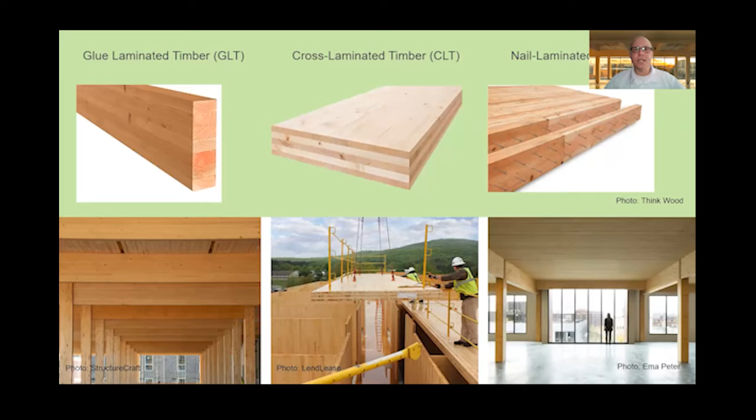Now, nail laminated timber is really what it seems to be, right? It's dimensional lumber, face nailed to one another, and you create a panel product that you can lift and place just like CLT, except you're using mechanical fasteners instead of structural adhesives to hold those laminations together.

The last 3 products I want to touch on: dowel laminated timber. Now, just as everybody was really starting to get their head wrapped around what cross-laminated timber was, industry introduced dowel laminated timber. And basically what that is, is the softwood base material. You take 2x material and lay them side by side. And then you take a hardwood dowel that has a moisture content that is less than the base material. That base material is pre-drilled.

That hardwood dowel is pressure injected through that base material, and over time, it will wick the moisture out of the base material, expand the hardwood dowel, and mechanically lock everything into place. So the nice thing about this is there's no steel fasteners, no metal fasteners, no resins, no glues, no adhesives. So you have a completely green product from start to finish.

Mass plywood panels, or MPP panels, that's really an iteration of cross-laminated timber. Where CLT uses dimensional lumber, MPP panels use veneers, like a structural composite lumber, to create large billets up to 24 inches in thickness. So really, we're looking at using these as panel products. They can even be manufactured and fabricated as columns and beams as well.

And last, but certainly not least, is heavy timber lumber decking. Now, we see this used quite frequently in applications where maybe a design team feels a little bit comfortable with using a glulam post and beam system, but maybe not really ready to dive into using CLT or something like that. A heavy timber decking product will actually really give you that look without necessarily having to commit to learning CLT and the design of that.

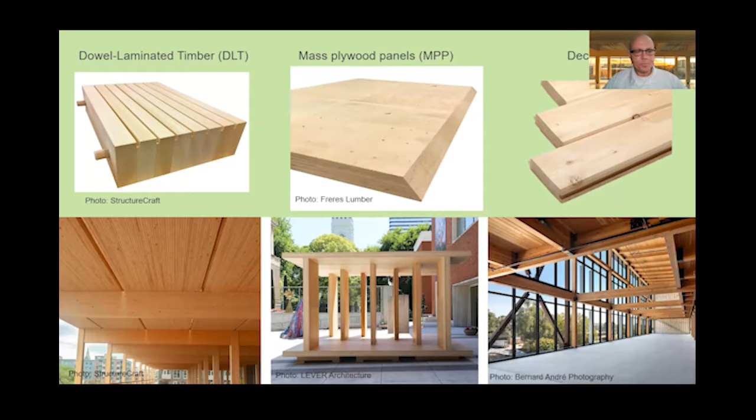The next one I want to introduce is T3 Atlanta. Now, T3 stands for Timber, Transit, and Technology.

This is the second building that was developed by Hines, and for the second time, StructureCraft was selected by Hines as the mass timber structural engineer on the project and the builder for the timber superstructure. So the first T3 was in Minneapolis, and that was completed back in 2016, and it really helped spark that kind of mass timber revolution that we're currently seeing in North America.

To give you a little bit more detail about this building, the gravity system really used dowel laminated timber, like we just spoke of, for the floor and roof panels, and then glulam post and beam substructure. The whole entire lateral system on this building is perimeter and internal steel brace frames that StructureCraft actually installed in sequence with the timber structure, rather than using a concrete core. This really helped them speed up the process of construction.

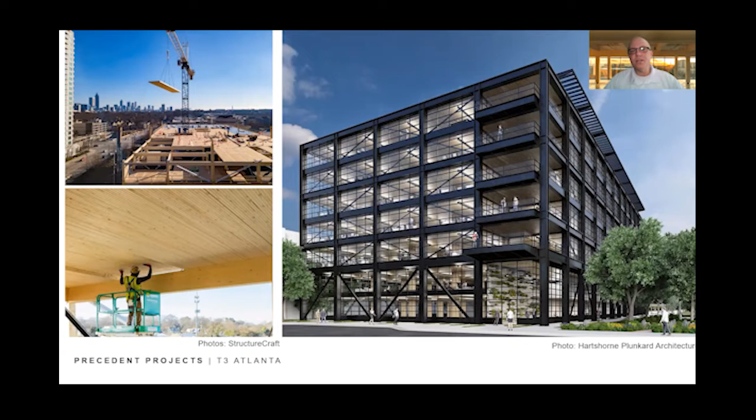So overall, we're looking at a 7-story building, about 205,000 square feet in Atlanta. Really exciting project.

Now, mass timber in the code. What do our current codes allow us to do with mass timber? So as it stands today, and yes, even in Florida, we can get up to about a 5-story residential type project with mass timber when we look at, say, type 3, type 4, type 5 construction. That's what we're very comfortable with. That's really the sweet spot for timber construction, whether it's light frame or heavy frame or mass timber.

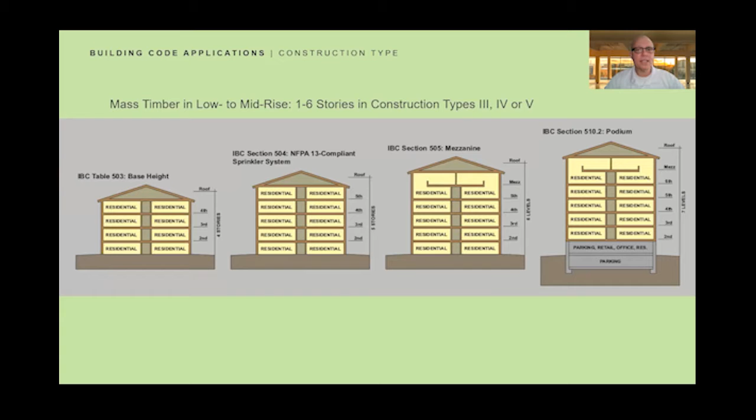With a business occupancy, we can get upwards of about 6 stories. And so when we think about this, we can really have some great opportunities for residential and business occupancies. And we can really even push the envelope a little bit further by incorporating a mezzanine in there, or putting it on a podium, something like that, to help increase density in areas where we may need that.

Now, that's what we can currently do, but what does the future tell us for mass timber? How are the codes evolving to allow us to push that building envelope a little bit further? So the 2021 IBC actually introduced 3 new types of construction specifically created for mass timber. We'll now have a type 4C that will allow us to go 9 stories and 85 feet. We'll have a type 4B, which will allow us to achieve 12 stories of mass timber up to 180 feet in height, and a type 4A, which will allow us an impressive 18 stories and 270 feet in height.

Now, the thing to keep in mind here is each one of these have varying levels of fire protection that is required, and a handful of other requirements during the construction process, which is a conversation that we can dive into at a later time. But really, with a type 4C building, you're going to be able to leave that entire structure exposed.

In a 4B building, there's going to be a little bit of an interaction equation that you'll have to apply based on fire area, where you can leave either a portion of the wall exposed or a portion of the ceiling exposed, and using that interaction equation will allow you to determine the percentage of the structure that you're actually allowed to leave exposed in that building.

And then the type 4A building is going to be completely encapsulated. All of your mass timber exterior bearing walls will have to have 3 hours of fire protection. Two of those hours can come from membrane protection, and the additional hour to achieve that 3-hour rating can come from charring calculations. And then the floor panels and roof panels require a 2-hour fire protection. So varying levels of protection required.

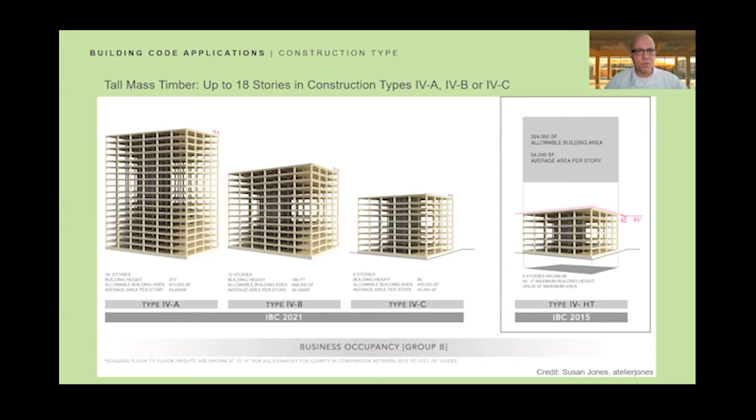Will Florida be adopting this? We don't know. The Florida Building Commission has just started their meetings. They just wrapped up the 2021. So they're just starting code hearings and meetings and going through this and trying to determine where we're going to land on this. So more to come over the next several years in the next code cycle.

Now, jumping into the opportunity and everything that we're super excited about here, talking about the grant that LULAB received. So in August of 2019, LULAB received a Wood Innovation Grant with the support of WoodWorks. I have been on the team here at WoodWorks; July will be 7 years for me. And previously, there was really no motivation to try to break into Miami, because we all know it's typically a concrete jungle. And then arrive Chris and Shauna Meyer, who reach out to me and say, hey, we're looking to do this Wood Innovation Grant. Would you write us a letter of support?

And so for me, it was a no-brainer to have this wonderful team down there to kind of help be the catalyst, if you will, to get this process going. And so really the intent was to help raise awareness in South Florida of mass timber. And we were able to hold our first event, pre-COVID, just before we hit that, right, in February of 2020.

We had the first mass timber event at the Perez Art Museum called Miami Resilience. It was an absolutely wonderful event. We had the opportunity to kind of roll out an introductory presentation on what mass timber products are, a little bit more in depth than this intro that I did. But really it was a way for us to kind of break into the industry in South Florida and start explaining what mass timber is and what the benefits are.

That was followed up by an evening event as well at the University of Miami at their School of Architecture, where we had some additional speakers and just really a great opportunity to learn more about what LULAB was doing and the School of Architecture was doing there at the University of Miami. And then in August of 2020, Wood and Everything After, they created an upper level design studio that was taught at the School of Architecture at the University of Miami.

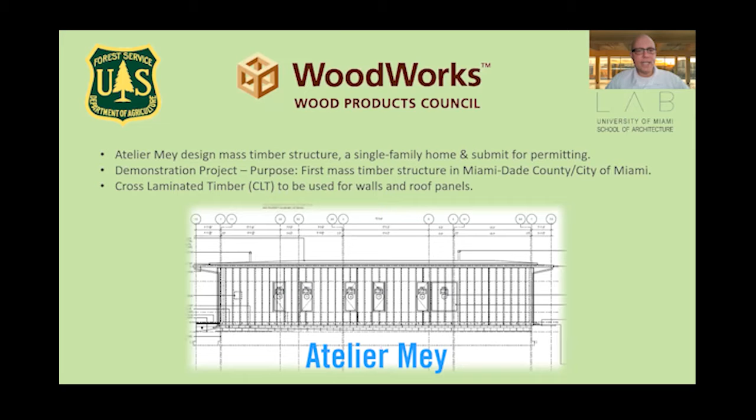And so the intent was to use cross-laminated timber for the walls and roof panels as well on this project. And here's just kind of an interior rendering of what it looks like, as well as a site plan of the project. Now, what were the conditions for acceptance that Miami-Dade had in place? And so first and foremost, we had to show them that it was in the Florida Building Code. So section 2303.1.4 is the section of the Florida Building Code that states that all cross-laminated timber has to be manufactured in accordance with the APA PRG 320 standard. So in order for them to even consider that, they wanted to make sure that the manufacturer met those requirements.

The next was section 1626.2, the large missile impact test. I initially thought that was going to be the biggest hurdle for us to overcome, but it really ended up being the wet-dry cyclical testing, where we had to make sure that we showed that CLT could be superior to their requirements in section 2315.

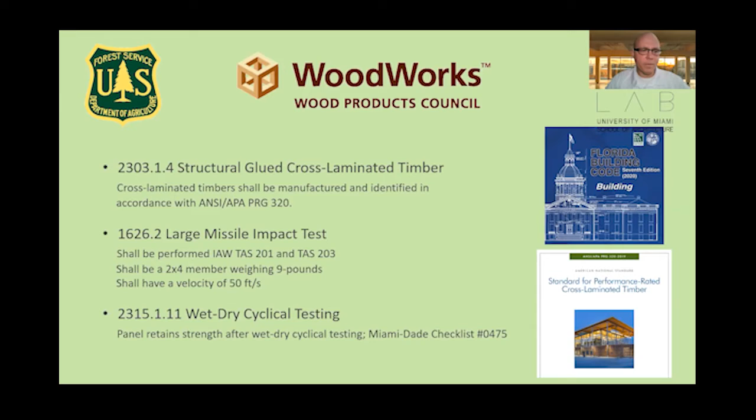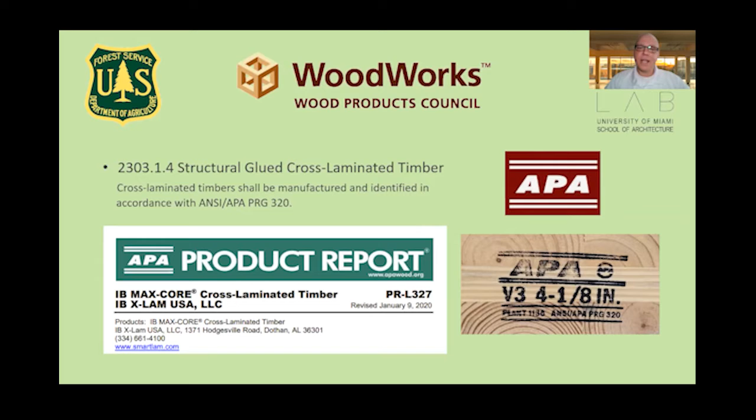So what kind of data and test reports did we have to submit? So in order really for them to say, okay, we feel comfortable, we see that it's in the Florida Building Code, but the manufacturer has to prove to us that they meet those requirements and they manufacture CLT in accordance with that standard. And so basically, it fell onto the shoulders of SmartLam, who would be the CLT provider for this particular project, and they really had to submit their product report showing that they met the requirements of the PRG 320 certification process and that their manufacturing facility was indeed certified.

The next step was really showing how we could meet the equivalence or better for the large missile impact test. And so what this really required is that there had been no traditional missile impact test that had been done on CLT as it would relate to hurricane loading, but a tornado shelter test had been done on CLT by the US Forest Products Lab. And so if you look at the difference between these two tests, you can see that there was a significant difference.

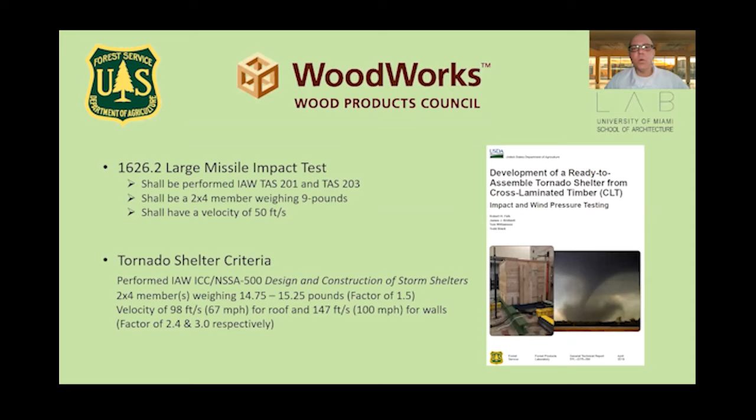This tornado shelter testing, really the weight of the projectile that was used was really on a factor of about a 1.5. So the mass for the projectile was significantly higher, as well as the velocity in which this missile would be fired at, upwards of a factor of 2.4 and 3.0 respectively. We're talking 50 feet per second, upwards of 147 feet per second. So Miami-Dade saw this information and said, okay, this test is far superior than what we're requiring. It meets the requirements for the large missile impact test.

Then it really came down to this wet dry cyclical testing requirement, or basically the moisture durability test. They really wanted to make sure that once this material was exposed to the hot, humid climates that we see here in Florida, that there wouldn't be any issues with the glue bond or delamination, if you will. They wanted to see that the panel maintained its strength. And so one of the big hurdles that we had to overcome was checklist 0475. And that was really for structural composite lumber. So basically plywood and OSB.

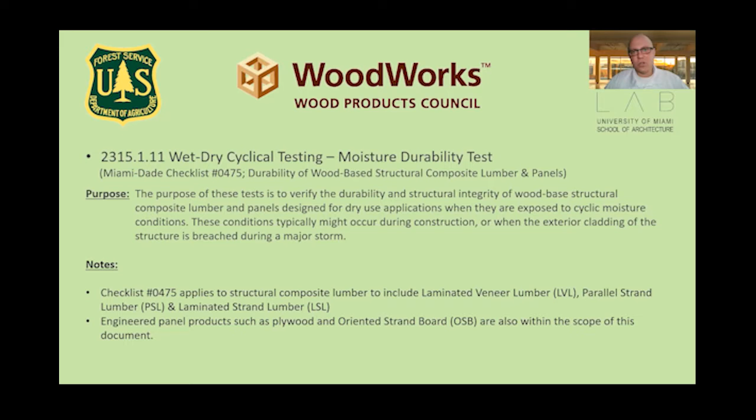So prior to this, Miami-Dade had never experienced CLT, and we needed a basket to put CLT in. And it fit the mold for a quote unquote panel product. While it wasn't a structural composite lumber that we were trying to present to them, it was dimensional lumber CLT. The PRG 320 standard still said that you could create CLT out of structural composite lumber. And so the main concern really became that glue bond and to make sure that that panel maintained its integrity and its strength after that cyclical loading test. And so how did we get there? How did we show them?

So in order to achieve that acceptance, there's a Canadian standard, CSA O112.10, which is basically the evaluation of adhesives for structural wood products. And so while we don't necessarily require that in the United States, the manufacturers that produce CLT don't want to cut off any potential opportunities to have projects in other countries. So all of their products meet this requirement. So luckily, we were able to bring this to the attention of Miami-Dade County. And then you can see here that it goes through a vacuum pressure treatment test. It goes through a boil, dry, freeze treatment test. And really what we wanted to show them was that this test was far superior.

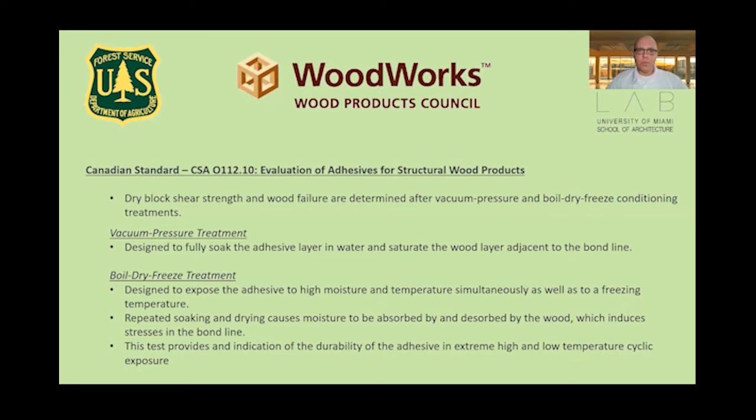So what ended up happening is we ended up leaning on the glue manufacturer that is used specifically for SmartLam's V3 grade dimensional lumber CLT. So Henkel was able to submit the documentation of the testing to show that their testing criteria supersedes the requirements of Miami-Dade County, and that it was a superior or more stringent test than the requirements that were set forth by checklist 0475. And so really the exciting news to share with you, as of last evening, I received an exciting text message from Shauna stating that they have permit in hand for Miami-Dade County's very first mass timber building.

And so while Chris was very kind to point out that a lot of this couldn't have been done without my help, I would say that a lot of this could not have been done without the absolutely amazing team of industry experts that we all pulled together to make this happen. There was definitely no one person that made this happen. It was a team effort. And I really just want to give thanks to Atelier Mey Architects for having the motivation and excitement to do a project like this and be willing to really take that uphill battle. WoodWorks, of course, SmartLam North America, Britt Peters and Associates, APA, the Engineered Wood Association, the American Wood Council, Miami-Dade County, and of course, the University of Miami School of Architecture LAB. Without all of these parties, this definitely could not have been achieved.

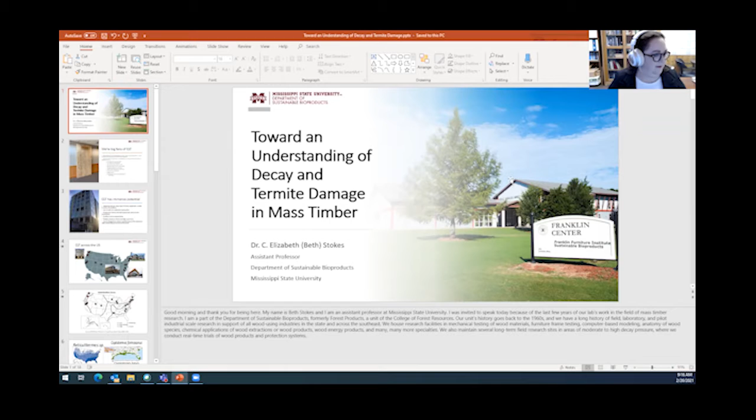Apologies, let me get my screen set up going here.

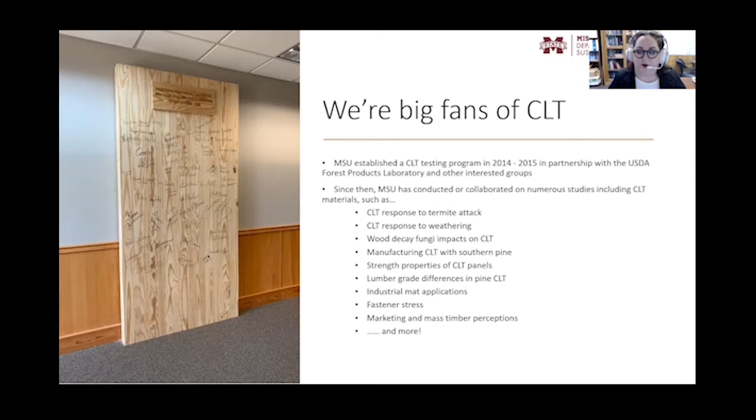So I say all that to say that our department is really hopeful that by investing resources and research efforts, we're going to continue to support the development of CLT across the Southeast as a very sustainable, highly desirable product for construction and industrial purposes. We believe this because we know that CLT has an immense potential.

We know its potential for industrial matting and heavy equipment use, but we've also seen firsthand the potential for low to mid-rise residential construction. The components for using CLT blend so well in a hybrid system with steel and concrete construction. It has unmatched carbon sequestration potential. It performs so well in seismic and high wind studies. Those have been done over the last 8 to 10 years. And it can be designed to achieve excellent fire resistance while maintaining a really strong structural performance. And we are so committed to seeing this proliferate through the Southeast.

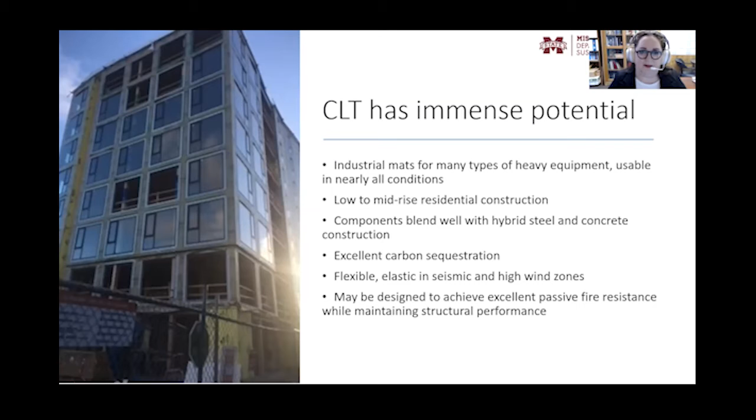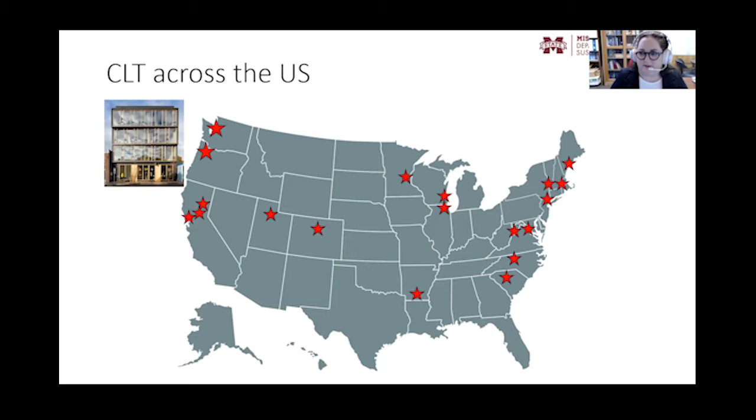Across the U.S., I just threw on some examples of where we're seeing CLT pop up. Things from Albina Yard in Portland, Oregon, which was the first U.S. CLT building from domestically produced CLT, to Adohi Hall. This is our new one at University of Arkansas, first large-scale mass timber residence hall and living learning community.

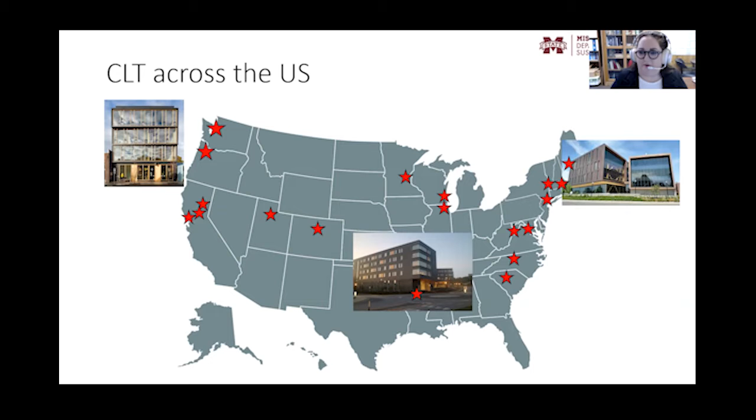Jeff mentioned the Olver building at UMass Amherst, largest academic CLT building. And from our friends at Clemson, we have the Quattlebaum Outdoor Education Center, which is the first CLT building in the southeastern U.S. made with southern yellow pine constructed panels from the Dothan, Alabama plant. These are not all of them, but these are some of the outstanding projects that I wanted to point out.

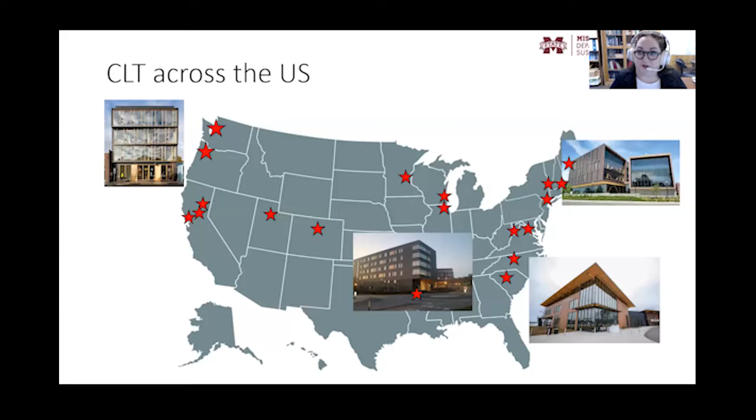So far, our buildings have been in zones 1, 2, and 3. We are now constructing buildings in zones 4 and 5 in Arkansas and Clemson and in Florida and in Alabama and so forth. We need to consider the different types of pressure that these buildings would face. If you were to build a simple post and beam structure on your own property, you would ensure that those materials were being used in an appropriate way.

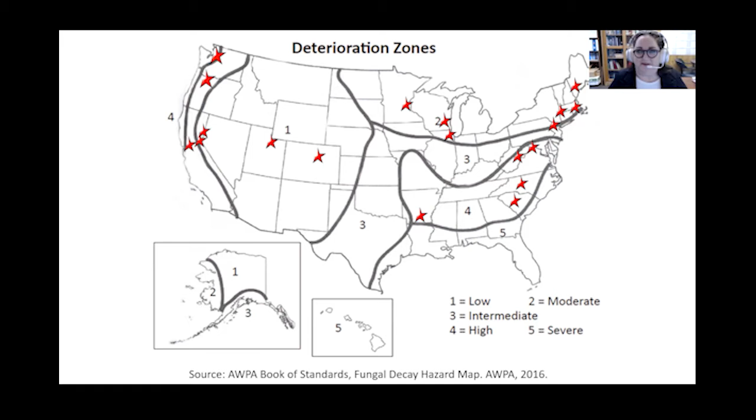We have to consider mass timber in the same way. We cannot just throw it into place and move on. So, there we go. One of the strongest pressures that are facing wooden structures in North America are termites. This is a question I get constantly: my mass timber is going to be attacked by termites. Not if you do the right things. And we know how to take care of termites.

Same with decay pressures. Termite pressures differ around the country. If you're in more northern areas, less of a problem, really not a problem. When you get into Southern California and the southeast, we have heavier termite pressures, not only from our native Reticulitermes species, which you see on the left of the slide, but also from, on the top right, the Coptotermes, the Formosan invasive termite, which is all across the Gulf South, down into Florida, across Louisiana, and unfortunately also drywood termites.

There are a few species of drywood termites. Typically, we see issues with these in Southern California, the deep Gulf South, Florida, South Texas. These are the termites that you would find in an attic that don't necessarily need contact with the soil to survive well. And they add a layer of concern in certain areas. So with these pressures comes a need to understand how we protect our wooden structures.

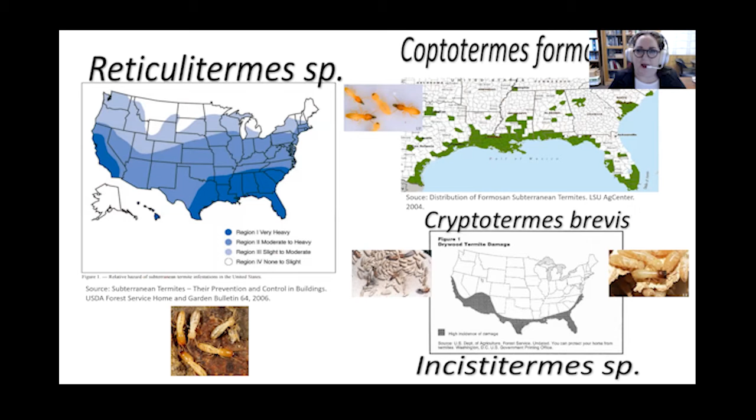I will address, while I have time, a few of the research questions that we have investigated so far. They really boil down to 3 areas. Our first question was, is typical CLT adhesive termite resistant? When I first started working with CLT in 2014 and 2015, one of the comments that I heard consistently is termites are not going to go past the glue line. CLT is so massive that that glue line is going to be a barrier. If that is true, it is a brilliant step in preventing termite infestations.

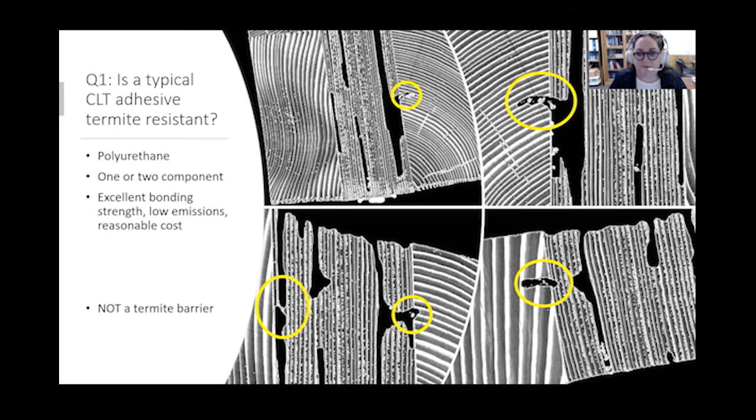So to look at that, we took some CLT sections and put them in the absolute worst case scenario. This is not something that a building should ever see. Absolutely worst case. And I will point out that it is not a barrier. This is a CLT made with a polyurethane 1-component adhesive that has excellent bonding strength, low emissions, reasonable cost, wonderful stuff, very strong CLT, fantastic. It's not a termite barrier. And you see in the yellow circles, our native termites were able to chew their way right across the glue line. It's just not a barrier in a worst case scenario.

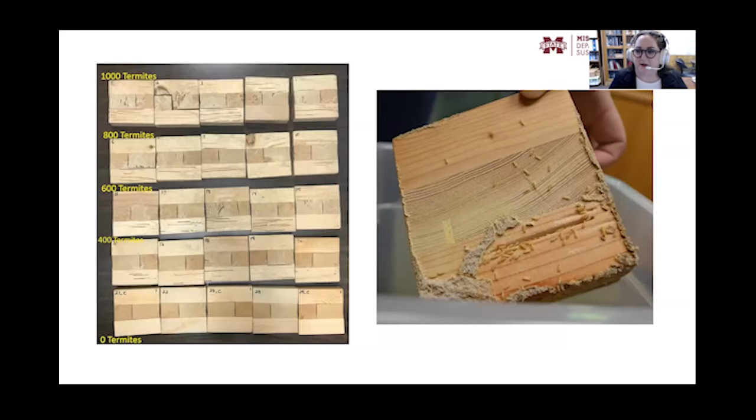We also conducted some field trials. So this is an AWPA standard test called E21. We tested 18-inch sections of 3-ply CLT. These are placed onto concrete blocks that simulate a concrete foundation, but with no barriers between the wood product and the concrete. Additionally, there is a bait stake, a piece of pine driven into the ground inside that concrete block. The idea is to give termites the most access they could possibly have to this material. And do they choose to come after the material or not is the test.

So we tested untreated CLT, unprotected, against treated pine lumber, against a treated 4x4 post, and against untreated pine lumber. And when we picked up the CLT, we noticed that the outside doesn't look terrible. It doesn't look particularly destroyed. It looks a little stained and problematic. But we tapped on it with a putty knife, and the putty knife went straight through it. It's basically hollow. So we know that unprotected, termites will do damage.

And given time, they will do damage. We'll come back to that in just a minute. Our second question has been, how do wood decay fungi interact with CLT? If you'll forgive me, I'm a teacher by trade and training. I need to give a little educational side note.

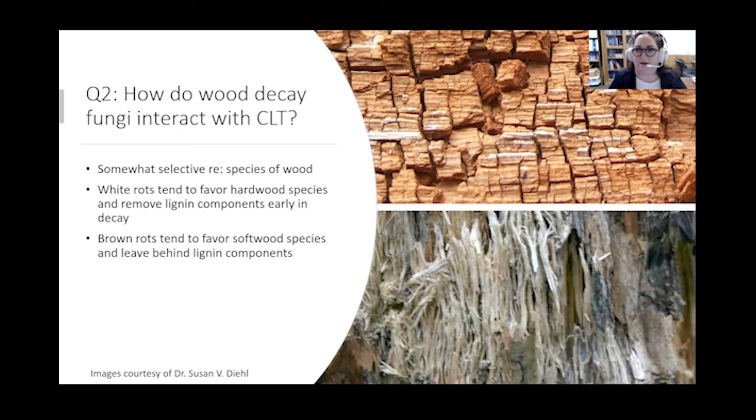If you don't know, there are basically two types of wood decaying fungi. There are brown rots and there are white rots. White rots tend to favor hardwood species. They remove their lignin components early in decay and leave what you see on the bottom picture, which is this white stringy cellulosic substrate. Brown rots kind of do the opposite. They tend to favor softwood species and they leave behind brown crumbly lignin components as they consume cellulose. These are the two basic types.

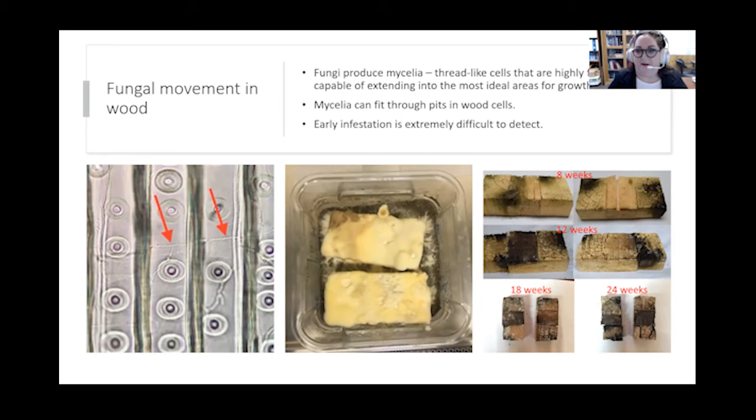Given the conditions, yes, wood decay fungi will attack. However, with the application of CLT, the way it is written in the codes now, it is extraordinarily unlikely that a CLT product used in the recommended way would ever encounter a decay fungi. Decay fungi are not the issue. It is more likely that mold and stain fungi will be problematic. And this goes back to interaction of CLT with water. Water intrusion and dampness provide ideal conditions for surface molds.

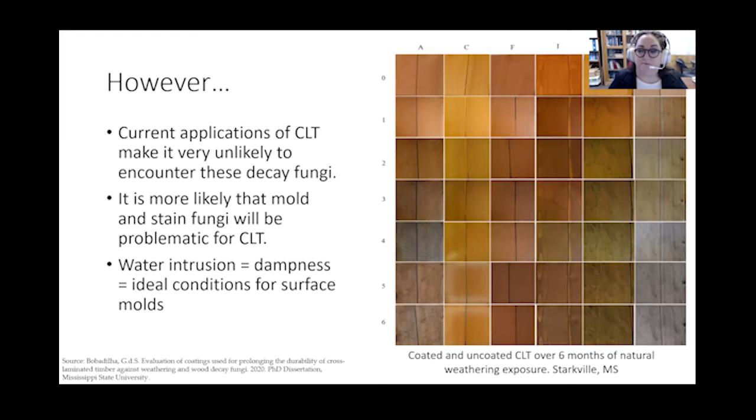My postdoc just published a paper in MDPI Coatings Journal on this, where we have coated and uncoated exposed CLT outdoors. We have a matched set here in Starkville and another set in Madison, Wisconsin. They've been exposed. This is the first 6 months of exposure. In the far right column, you can see the graying of the product over time. The others are coated and have various levels of success. It is mold and stain fungi that are going to make the difference.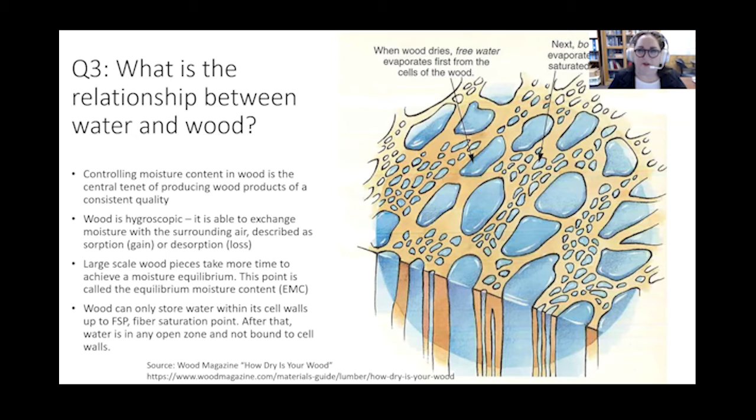Why is water such a big deal? Well, that's really our third question. Controlling moisture content is a central tenet of producing wood products. It's all because wood is hygroscopic and seeks to be at an equilibrium. By understanding the effects that water has, we can prevent a lot of the issues associated with wood, including protecting CLT and other mass timber products. To put it simply, water opens everything up. Insects rely on it, decay fungi need it, stains and molds need it. Water damaged wood is susceptible to all kinds of damage.

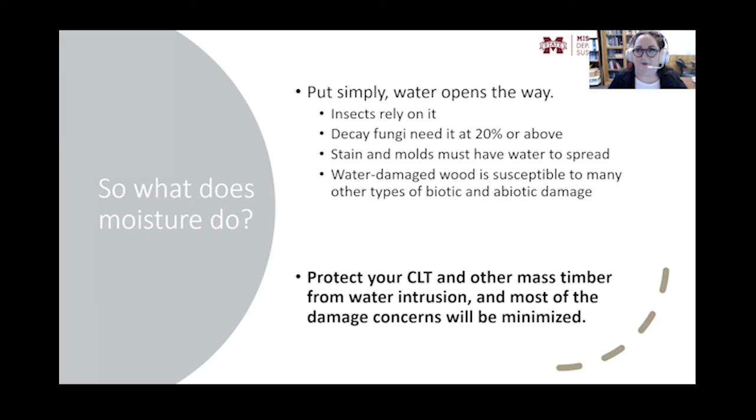If you don't hear anything else and don't take anything else from my presentation, if you protect your CLT and other mass timber products from water intrusion, your concerns about damage are going to be minimized. Other things rely on water. If you protect it from water, you've done 95% of the hard work. So we boiled this down into really 4 ideas. How do we apply CLT in a responsible manner?

Consider the location. Have you considered where you're building? Are there heavy storms predicted? Are heavy storms typical? Is this a high termite pressure zone? Have you considered the material? Is this going to be a southern pine or Douglas fir? What is the adhesive? Can you add a water barrier? Are you going to use treated or untreated material? Should you use a water repellent coating in a particular area?

Consider your structure. Your HVAC system, you should be preventing leaks and condensation anyway. It is especially important when you are using HVAC with CLT. In your openings, there should be no exposed, unprotected CLT material in a window frame or door frame or any other opening. Consider where your plumbing is being run. Is it going to be inside any ductwork, outside, or between panels of CLT? Is there a chance for leaks and condensation?

What are your roof overhangs like? Is there enough depth to keep blown rain off of it? How high is your trim and siding from the ground? Considering your occupants, what's the building's use? Is there an area that's going to require heavy water demand?

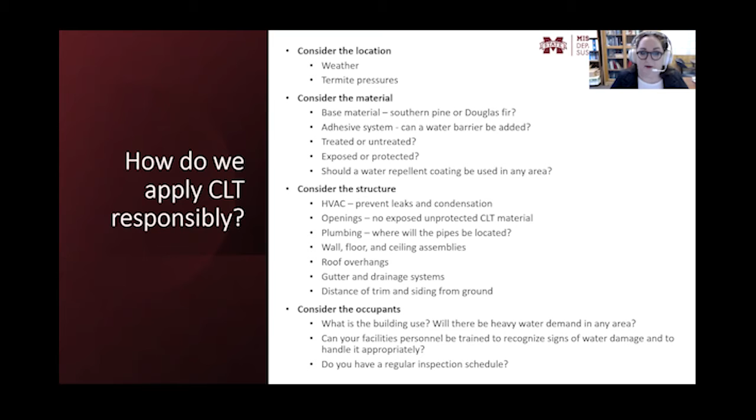Most importantly, we have found, can your facilities personnel be trained to recognize the signs of water damage and handle it appropriately? We think that this is going to be a key area for maintaining these structures for a long time. There are a few of these CLT structures. I know the Promega building in Madison, Wisconsin, has built-in moisture sensors throughout their CLT. They're monitoring the moisture in their building through its lifetime.

What I would like to end with is a request for you. I would like to ask for your advice and help. We use the ICC manual and the CLT handbook all the time as references. They're fantastic. They don't include a lot of the environmental information that we would like to share. What would be the most useful way for research groups like ours, like Clemson, like the Forest Products Lab, to disseminate this information throughout the industry?

Would it be a benefit to have a chapter added to some of these reference materials? Should we generate something new? We would like your input on this because there is going to be a vast amount of information that can be shared.

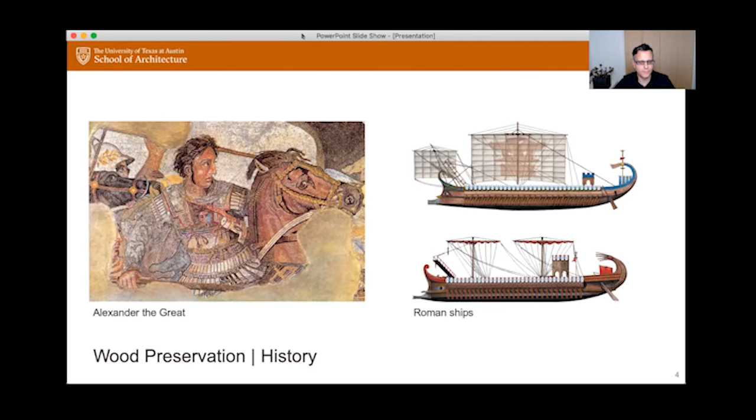There are some historical European documents in which the term ox blood can be found, which describes a type of paint that was used to protect wood. And contrary to popular belief, however, the paint did not contain blood, which would have had a very short workability time span. Blood would have not provided very good coverage. It would have faded, browned, and possibly even molded. But rather, the term was used to describe a red or reddish brown color, which had the appearance of ox blood. And the red coloration likely came from additives such as iron oxide or red ochre in the paint.

Now, for centuries, preventative measures were really the primary means employed to extend the lifespan of wood and its serviceability. And that included selecting durable species, determining the right time for harvest or drying, and then most importantly, appropriate architectural detailing. Those methods were utilized by craftspeople over hundreds of years. That expertise accumulated and was passed down from generation to generation. And following these rules allowed the construction of timber structures that were able to stand the test of time, and they provided sufficient evidence that the notion of wood as a short-lived building material is misconceived.

So there are Austrian farmhouses that still stand from the 18th century. The oldest Norwegian stave churches date back to the 12th century, and there's some Japanese monuments that date from as far back as 800 CE, making them one of the oldest surviving wooden buildings in the world.

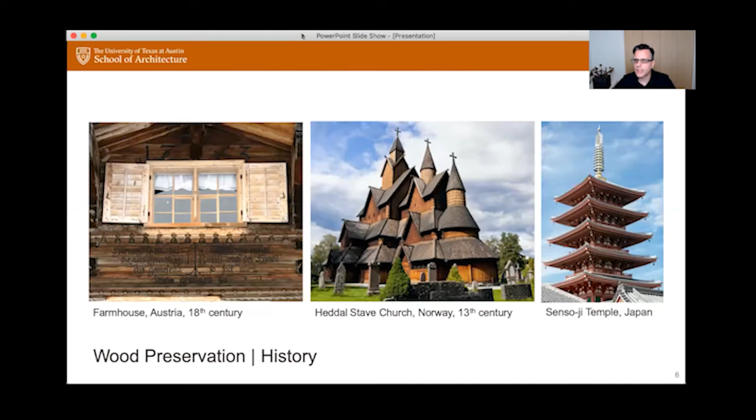Now, in the United States, the commercial production of wood preservatives began in the 19th century when vast amounts of wood were being used to close the frontier through, on one hand, the construction of the railroad, and then also to electrify the country. Wood was widely available and a lot less expensive than other materials when it came to producing railroad ties and utility poles, for instance.

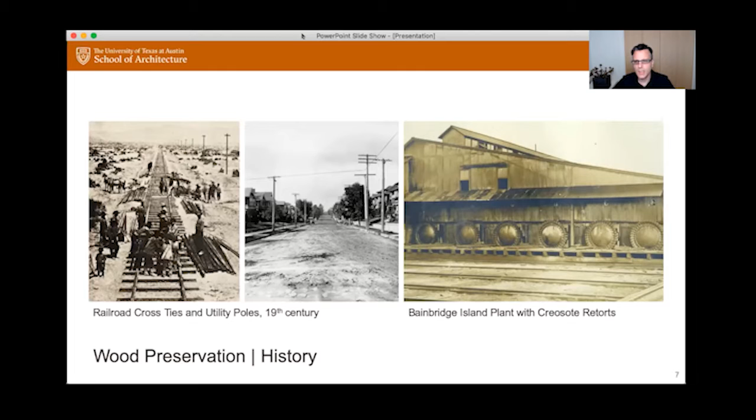But then again, these were in contact with the ground and had to be protected, which led to the introduction of pressure treatment for wood. And in many cases, that was accomplished with creosote. And you can see one of the historic creosote treatment facilities here on Bainbridge Island in Washington on the right-hand side.

So let's quickly look at what happens with wood that is exposed to the elements. There are photochemical, biological, and physical processes that alter the chemical composition of wood surfaces, and in worst cases, they can lead to decay. The lignin in wood is an organic polymer that's responsible for binding the cellulose fibers together, and due to prolonged exposure to ultraviolet light, that lignin degrades over time. This decomposed lignin is soluble in water and can be dissolved and washed out by driving rain. And this leaves behind white cellulose fibers.

Moisture from dew and precipitation then encourages the growth of microorganisms such as stain and mold fungi on the fibers, which leads to the familiar graying of wood. Now, depending on the environmental factors involved, this color change does not occur evenly, especially if you have protruding building elements that partially protect wood surfaces, as you can see here with the windowsill on the right picture. And so there might be an uneven aging process across exposed wood surfaces.

But all untreated wood surfaces, regardless of species, undergo the same transformative process. So this applies to low-grade softwoods that might come from temperate forests and also to high-quality tropical hardwoods. As long as the wood can dry out and there's no decay present, these physical changes do not really affect the strength or the integrity of the products themselves.

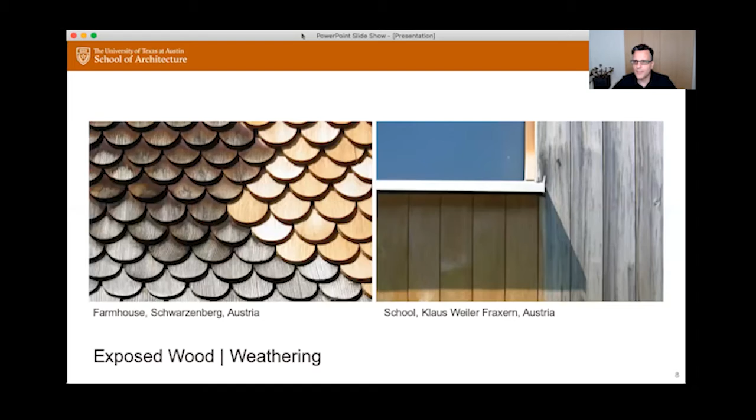So Elizabeth already touched upon how we control decay, and I'm just going to repeat it here. The most effective and practical method of preventing decay is controlling the moisture content of wood. Optimum conditions for decay occur above 20% moisture content, around 25%. And if wood is installed and maintained below a moisture content of 20%, it will not decay. And that situation is true for most wood in protected conditions.

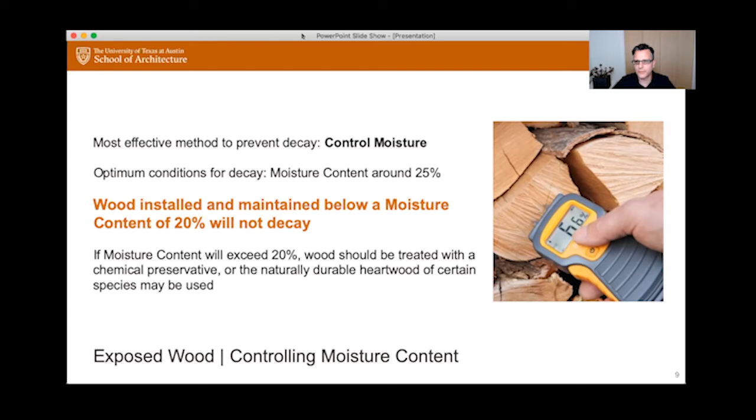If moisture content will exceed 20% due to exposure conditions, then there are options to treat the wood with a preservative, or you could choose a naturally durable species. Now, in terms of naturally rot-resistant woods, there are species that are resistant to decay in their natural state, and that's due to high levels of organic chemicals called extractives. These extractives are deposited in the heartwood of certain tree species as they convert sapwood into heartwood.

Now, we're all familiar with the range of tropical hardwoods, ipe, teak, merbau, massaranduba, and others that possess some of those qualities. But a lot of us might be hesitant to employ some of these products due to the sourcing issues that come along with it. There are some domestic rot-resistant species: western red cedar, eastern red cedar, black locust, black walnut, redwood. Some of these species tend to be prohibitively expensive for general construction applications, and some of them might not have the required properties in terms of hardness or structural properties. And some of them, such as the redwood, are even on the IUCN Red List as an endangered species. So we have to be careful which species we employ.

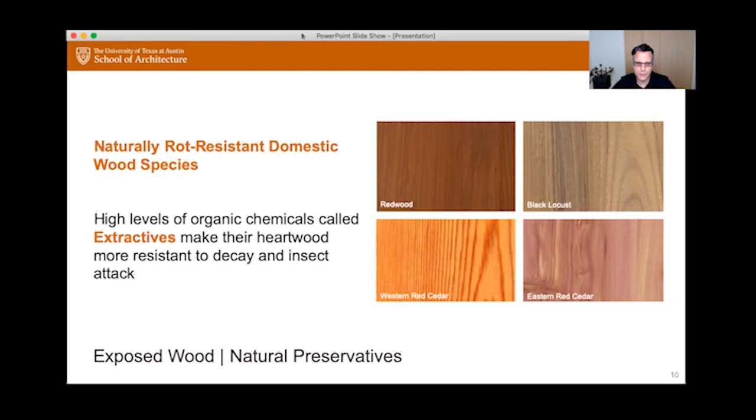Then we can resort to chemical preservatives. This list is by no means exhaustive, and it also contains some early wood preservatives that are no longer used in building construction applications. But we can generally classify waterborne preservatives and oil-borne and creosote-based preservatives. The waterborne preservatives are most commonly used for pressure treatment. They tend to leave the wood clean, odorless, and easy to paint, stain, and finish, and they tend to be less environmentally hazardous than other preservatives.

The oil-borne and creosote-based preservatives, on the other hand, are much less used than waterborne equivalents. They tend to be used for non-building applications such as utility poles and railroad ties, and they're being used less and less each year and may eventually be banned altogether due to environmental concerns. There are different application methods for chemical preservatives: non-pressure methods that involve brushing, spraying, dipping, steeping, soaking, but we're likely most familiar with pressure processes that provide deeper and more uniform penetration and higher absorption rates of preservatives, and also allow large-scale production.

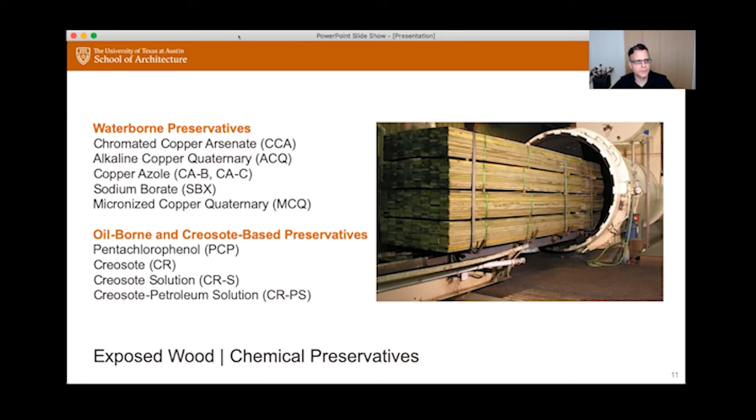The American Wood Protection Association is a nonprofit organization that disseminates voluntary wood preservation standards, and most specifiers of treated wood recognize and use these standards. They're developed in an open consensus-based process that involves individuals from all facets of the wood preservation industry. And it's really about making sure that treated wood performs satisfactorily for its intended use.

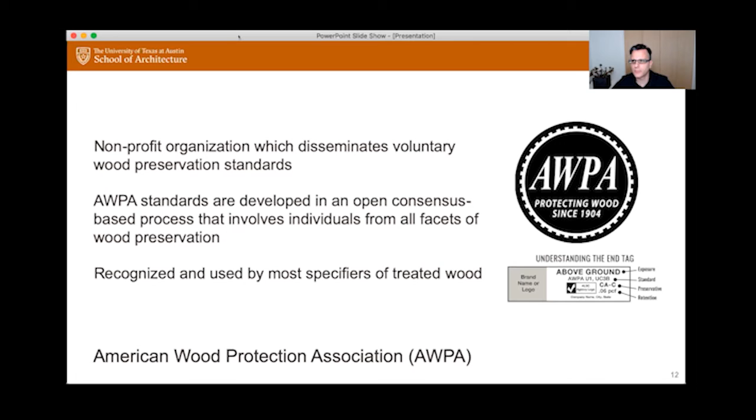And if you pick up a piece of treated wood, you might find the end tag stapled to the end grain, which, if it follows AWPA standards, will give you information about the standard employed, the preservative, and other additional information.

Another way to protect wood are coatings. We've talked about UV exposure that leads to the decomposition of lignin on untreated wood surfaces. The pigments in stains, lacquers, and paints protect wood from UV exposure. They also provide a certain level of waterproofing, reduce the absorption of moisture. They provide mechanical protection from dirt, driving rain, and hail. First and foremost, they impart color and can ensure color retention.

And it really depends on the opacity levels of those coatings. So paints and opaque lacquers provide the best protection because they block all UV rays, whereas semi-transparent stains will offer some, in most cases sufficient, UV protection. The most effective ones contain iron oxide pigments. It's very much like a mineral sunscreen that you might apply to your skin that contains zinc or titanium oxide, which is literally about reflecting that UV radiation.

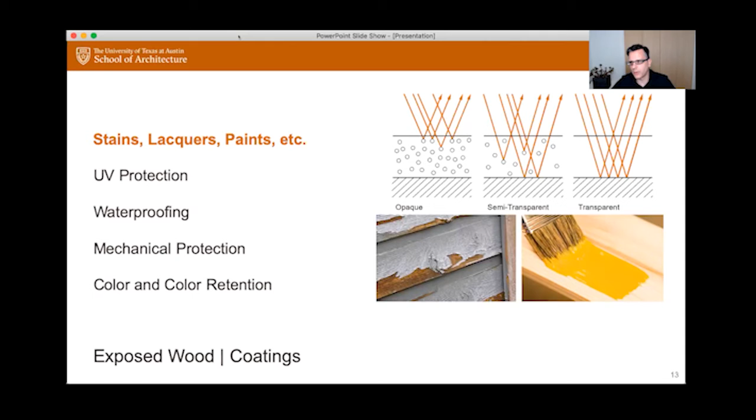And then lastly, transparent coatings are not really very suited for exterior applications. They might provide some water repellent qualities, but they really don't block any UV rays.

There are other ways to protect exposed wood through modification. You might have heard of thermally modified wood, which involves heating wood to high temperatures in the absence of oxygen. That prevents the wood from burning. Through this treatment process, the wood becomes much less hydrophilic, which means it tends to absorb less water and becomes more dimensionally stable and less susceptible to decay, rot, or insect attack.

Any wood can be thermally modified, and it turns the wood a dark brown color, which means that some otherwise nondescript woods can be turned into quite attractive products. The downside is that the strength and stiffness values can be reduced compared to the original wood, in some instances up to 30%.

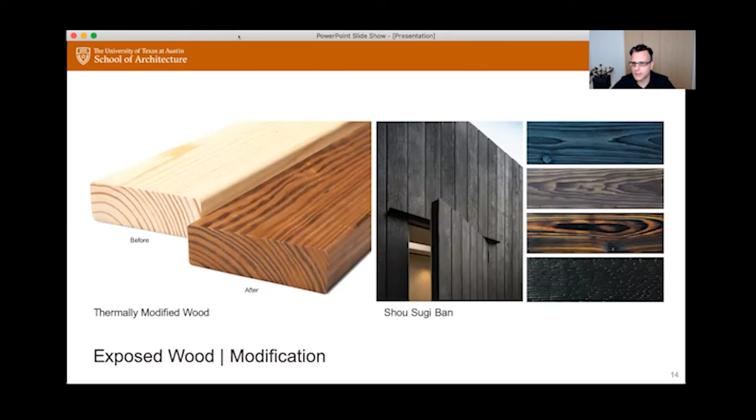And a lot of you might be familiar with shou sugi ban, which is a Japanese tradition of burning wood siding that dates back hundreds of years, where the Japanese discovered that a heavily charred board used for siding was much more resistant to rot and insect infestation, and also a lot less likely to ignite when exposed to sparks or flames. This method was vital in reducing fires, but is now primarily used for aesthetic purposes in exterior applications. Neither of these products are really suitable for structural applications.

There are some other modification methods. One of them is acetylated wood, which involves the chemical modification of wood at the molecular level to improve its performance properties. There's currently only one manufacturer that I'm aware of, which goes under the Accoya brand. They use Monterey pine. According to the manufacturer, this makes the wood more dimensionally stable and highly rot resistant, and apparently it is non-toxic and does not have the environmental issues associated with traditional preservation techniques. They claim that it is durable for 50 years above ground and 25 years in ground and fresh water.

And then lastly, furfurylated wood is wood that's impregnated with furfuryl alcohol produced from a bio-based liquid to make it dimensionally stable, which then undergoes a curing and drying process. I'm currently only aware of one manufacturer as well, Kebony, and they also use Monterey pine. The manufacturer also promotes it as a product that contains no toxins or chemicals, but it's mostly currently used in decking and cladding applications. The acetylated Accoya brand I've seen used in structural applications, as you can see in this small picture here with the bridge that's completely exposed in the Netherlands.

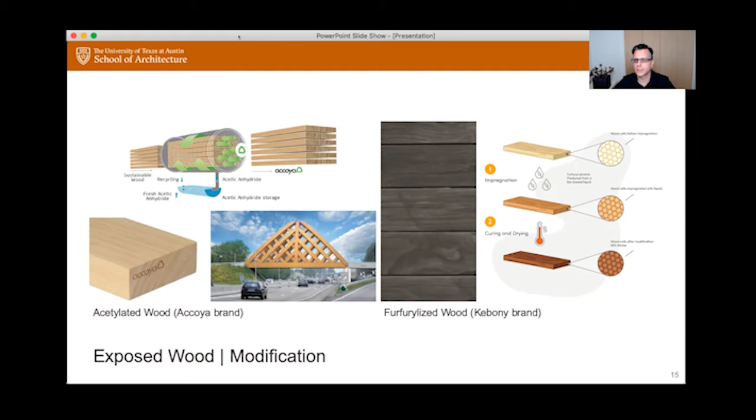One of the most effective ways, going back to it, of protecting wood in exterior applications are preventative measures related to proper detailing and design. And there's a German language term that describes the process well. Of course, there's a German language term for it. It's called konstruktiver Holzschutz, which is hard to translate into English. A poor translation of it would probably be constructive wood protection. And I believe we should exhaust these strategies before resorting to chemical treatments and coatings.

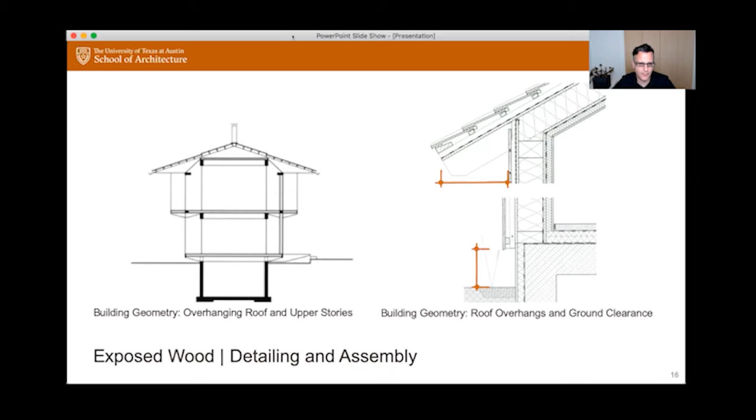I tell my students when they go out in the rain, they carry an umbrella, wear a hat, and wear rubber boots. So maybe your building, if it's made out of wood, should do the same. It's also about understanding that standing water on horizontal surfaces should be avoided, so protecting those horizontal surfaces. So those initial conceptual design images might actually look quite different once a proper wood protection strategy is implemented and something is constructed.

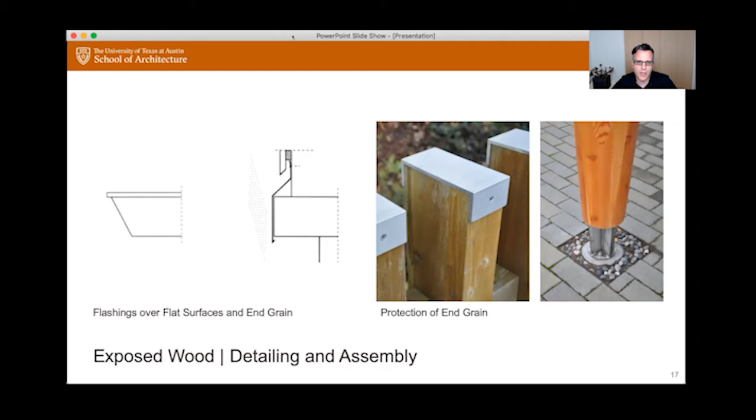And also understanding that the end grain will continue to absorb and wick water, just like the living tree did, and covering up that end grain and protecting it. And again, keeping it out of water; it's really about allowing things to dry out. So even if the wood gets wet temporarily, allow things to dry out.

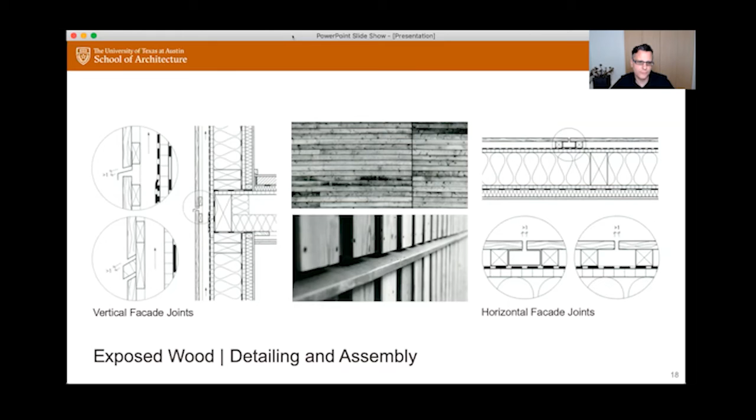And untreated wood is very popular right now in facade applications. And I always cringe at the examples that I walk past where vertical tongue and groove cladding is just butt joined at the horizontal joints. There's no opportunity for the end grain to dry out. That's where the boards are going to rot out first. And it's really about creating buildings that have longevity, and we're not changing things out after a few years' time.

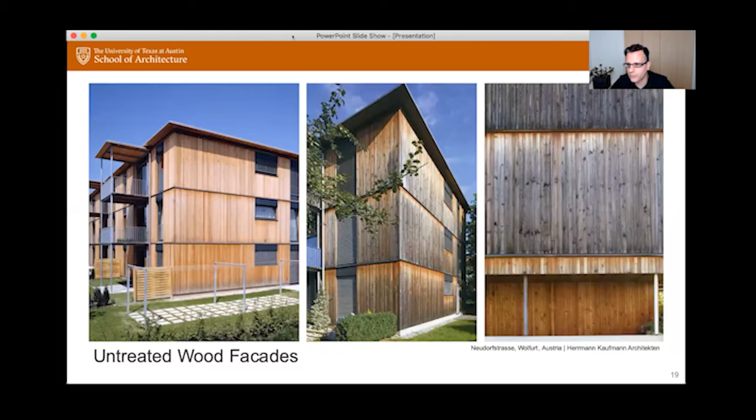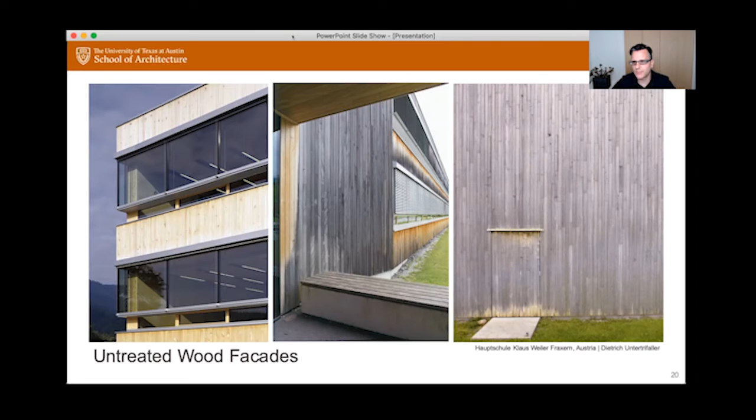And it's really about detailing buildings for longevity and also setting up client expectations. The picture on the left is kind of the money shot when the project is completed and published, but it starts looking different a few years down the line. And just making sure that your client is aware of that. And it's also about cultural acceptance, because what is accepted in one part of the world might not be accepted in another part.

So in closing, I just want to say that our relationship to wood is somewhat ambiguous. We love the natural, unique qualities of wood, but we use all means to halt or slow down its inherent natural aging processes. We love its ephemeral character, but we do everything possible to ensure its perpetuity. And I'm aware that not every wood building will feature exposed wood, but if it does, we need to make sure that it's protected properly and don't design buildings that don't last, because ultimately this will not help us in making the case for an increase of wood in construction.

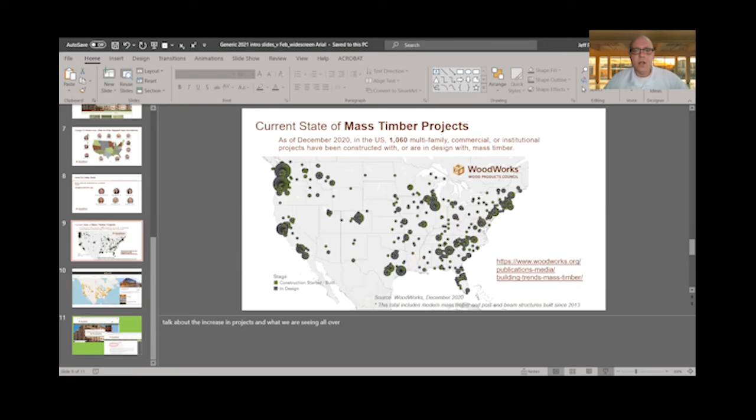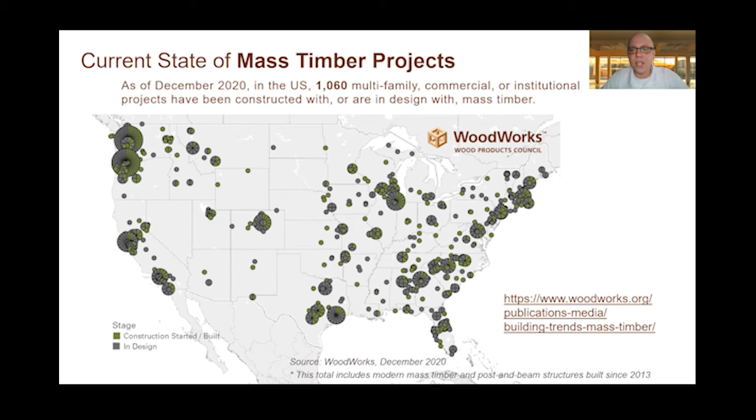If I could just share my screen really quickly, I had something queued up that I wanted to share, really the state of mass timber. Let me see if I can get this here. WoodWorks is aware of over 1,000 projects, 1,060 projects as of December of this last year, of mass timber. We're under the impression that this is only happening in the Pacific Northwest, but this is the first year on the East Coast where we've really seen this increase in mass timber. And these are the projects that we're aware of.

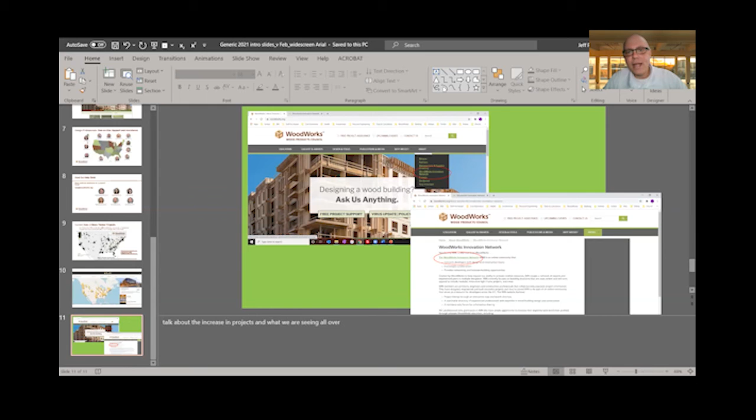Right now, this is mass timber. We'll add some light frame stuff by the end of the year. But right now, this is an extremely powerful tool. You go to the WoodWorks website, under the About tab, you can see WoodWorks Innovation Network, and click on that. In addition, we have a tremendous amount of archived webinars and presentations available at no charge for anybody.

If you're interested, please send me an email and I can guide you. I'm always happy to spend a little bit of time talking with you. I think Chris and Shauna both know that I'm very accommodating in helping people understand where this wood movement is going. And if you have specific questions about design, I'm here to help you with that. I'm always happy to help out whenever I can.

Yeah, I mean, one of the first organizations that I got involved with here in the United States was actually WoodWorks, and it started with the Wood Solution Fairs, and I believe, Jeff, those are actually free for students, or a very nominal charge, right? Yeah, we started them free, and then over the last couple of years, we did put a little price, but they're very inexpensive and typically free for students.

I have the reminders, the monthly reminders of the webinars. I attend all of those. That information is so invaluable in learning about these case studies and hearing all these professionals from all across the country talk about these things. I mean, that information is available to students.

And when I first started out teaching, I'm obviously in Texas. I'm not in East Texas where there's the piney woods. I'm in the middle of Texas where there's not significant tree growth. There's not expertise in wood. So when I started teaching that topic, I had to find resources. And I actually started using Zoom before anyone knew what it was. And I had people call in from Europe and from the Pacific Northwest because I didn't have the resources to fly experts in.